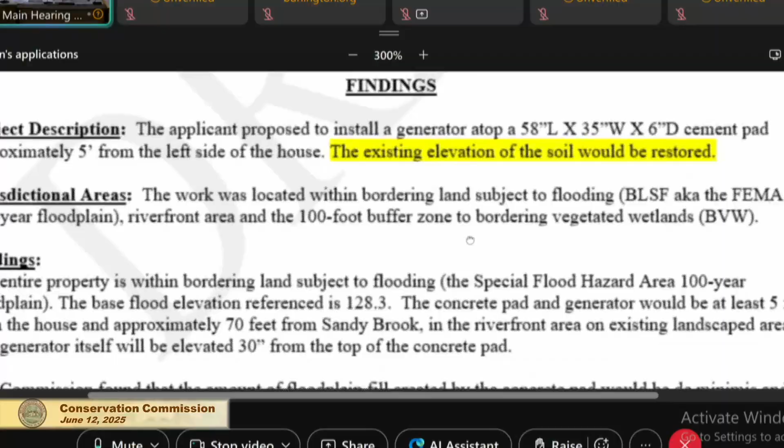You are welcome to. Okay, so, as Lucy explained, Ms. Power, the applicant proposed to install a generator atop a 58-inch by 35-inch wide by 6-inch deep cement pad, approximately 5 feet from the left side of the house. This is highlighted just because I wasn't 100% clear, and I'm not sure Lucy was at the time, about the existing elevation of the soil would be restored. So that's not quite right.

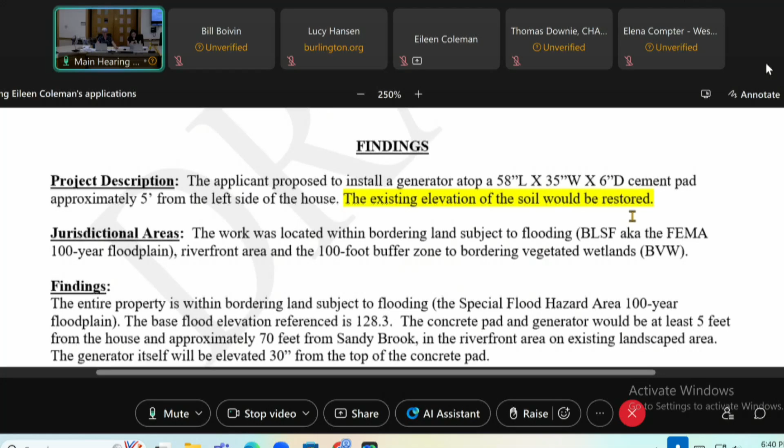The pad will be 6 inches above the existing elevation, something like that, right? Right.

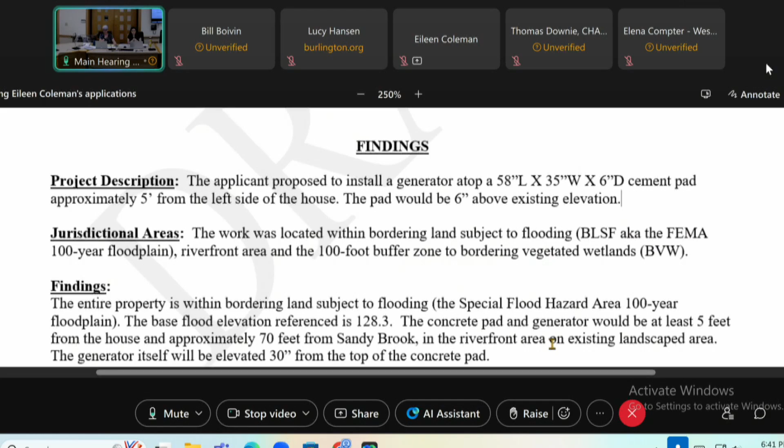The work was located within bordering land subject to flooding, BLSF, also known as the 100-year floodplain, riverfront area, and the 100-foot buffer zone to bordering vegetated wetlands. The entire property is within the bordering land subject to flooding with the base flood elevation at 128.3. It's approximately 70 feet from Sandy Brook in riverfront area, an existing landscaped area, and the generator itself will be elevated 30 inches from the top of the concrete pad.

The Commission found that the amount of floodplain fill created by the concrete pad would be de minimis and will not cause an increase nor contribute incrementally to an increase in the horizontal extent or level of flood waters during peak flows. The generator will be above the flood elevation. Additionally, because the entire lot is flat with a high water table, floodplain compensation would not be feasible. I'm actually going to remove that because that's, I should have noted that, sorry.

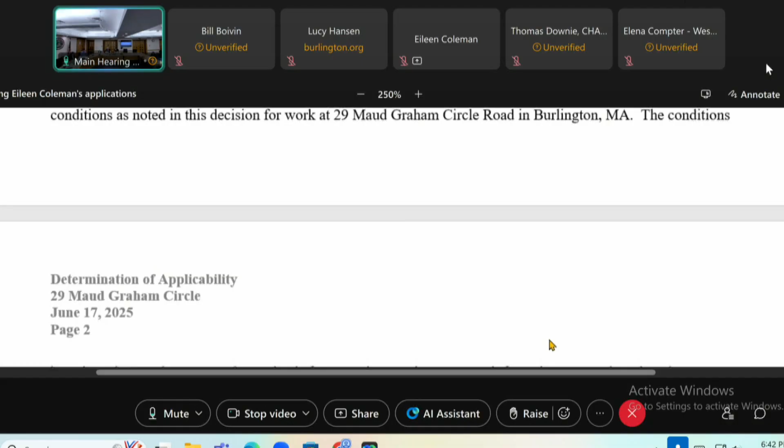The Commission voted to issue a negative determination of applicability with conditions as noted. The conditions are that the decision is only for the work we have described tonight and described herein. Anything else means you need to come back and check with us.

A concrete pad shall be installed on level ground, and the generator shall be attached thereto so that flood waters can flow beneath the generator unimpeded. The generator shall be elevated - I'm going to bold this - at least 1 foot above ground elevation so that it is above the flood elevation.

No tracking of sediments onto public roadways shall be allowed. This is going to be a very quick project, so I don't anticipate anything will happen. No filling or grading of the property under this decision, so only the pad and nothing else.

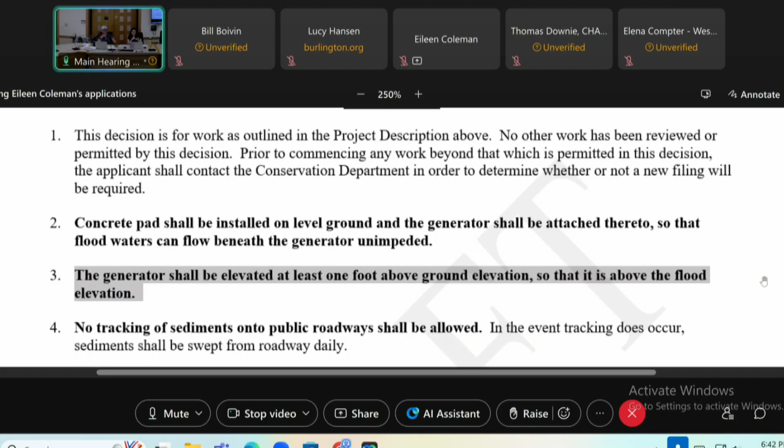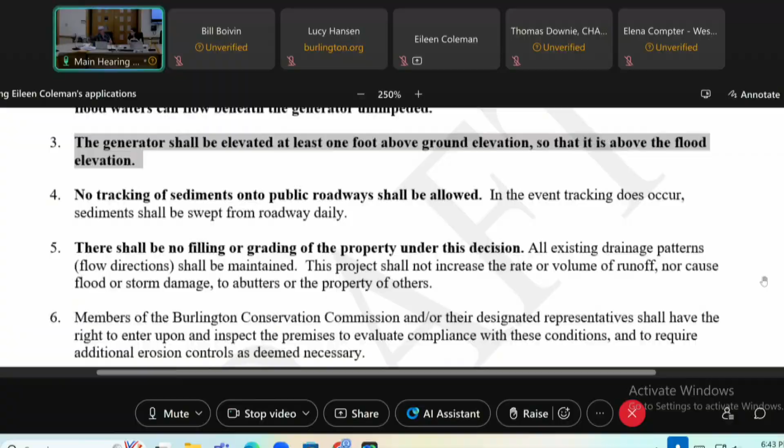Members of the Commission have the right to check on it, but it's probably going to be done in an afternoon. So not much to check on. In that case, we wouldn't think erosion control is required or something like that. Yeah, these are minimal conditions really for something like this.

Do you have any questions at all? Nope, that's pretty straightforward. We appreciate you actually filing with us to get it all correct. Yeah, want to do it the right way.

Could I have a motion to issue a negative conditional determination for the project at 29 Maud Graham Circle under Burlington Bylaw Article 14 and the State Wetlands Protection Act? So moved. Second? Second. All in favor?

So then I get official paperwork, and then I can reach out to the right-of-way company? It's dated June 17th now, what you had in front of you was the draft, so it will be issued on the 17th, that's a Tuesday. If you prefer to come and pick it up, you can tell us now and we'll have it ready. Oh no, that's fine, otherwise it'll just be mailed and then you can get going.

Okay, we'll sign off on the building permit, exactly. All right, perfect, good luck. Thank you very much with the project. Thank you.

I just want to comment here that on the drawing, it says the floodplain elevation was 129 in 2006, the date of the drawing. So it's actually gone down in the 19 years since then. So the new map is actually a little bit lower there.

Okay, so item 5 is a continued public hearing, notice of intent for Middlesex Turnpike and Bedford Street. The Town of Burlington Engineering Department would like to replace a gravity sewer. It is DEP file number 122-721. Anyone here for that one?

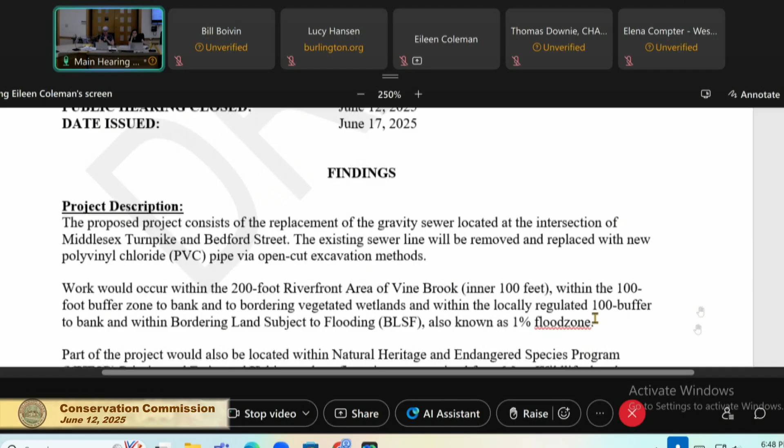Within the locally regulated 100-foot buffer to bank and within bordering land subject to flooding, also known as the 1% flood zone. Part of the project would also be located within Natural Heritage and Endangered Species Program priority and estimated habitat, and confirmation was received from Mass Wildlife that the project would result in no adverse take to resource area habitat of state-listed rare wildlife or take of state-listed rare species.

The project entailed approximately 985 square feet of work in the inner riverfront area and buffer zone and approximately 1,540 square feet of work in BLSF. The project qualified as a limited project under 310 CMR 10.53-3D as it replaces an underground sewer utility. The project meets each of the required conditions of this section of the Wetlands Protection regulations.

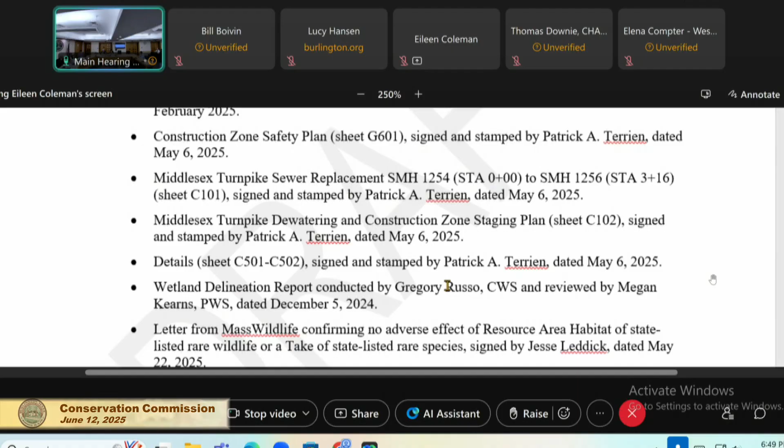Next is just the filing history, and then the plan document references. If there's anything you notice about those, like spellings or something, let us know in the next day or two. The wetland values and areas subject to protection include all the things I just mentioned: the 200-foot riverfront area of Vine Brook, buffer zone to bank and bordering vegetated wetlands, and bordering land subject to flooding. Work occurring within or in close proximity to those resource areas can generate adverse impacts.

The Commission finds that the resource area delineations are accurate, and the Commission finds that there are no practicable and substantially equivalent economic alternatives with less impact. They did provide a substantial alternatives analysis.

They went through the stormwater standards, and in all cases it was not going to create any new discharges, not altering peak rates or volumes of runoff, recharge rates won't change, it will not alter water quality, it's not a LUHPPL, it's not a critical area.

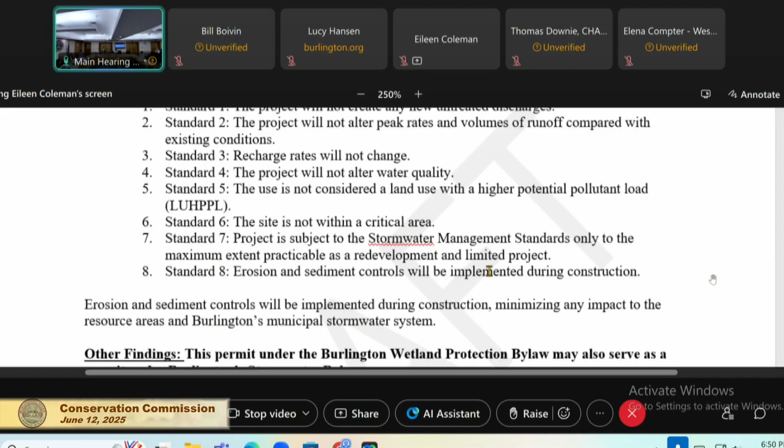It is subject to the stormwater management standards only to the extent practicable as a redevelopment and limited project, and erosion controls shall be implemented during construction. This permit under the Burlington Wetland Bylaw may also serve as a permit under the Stormwater Bylaw. The applicant is responsible for obtaining all other permits.

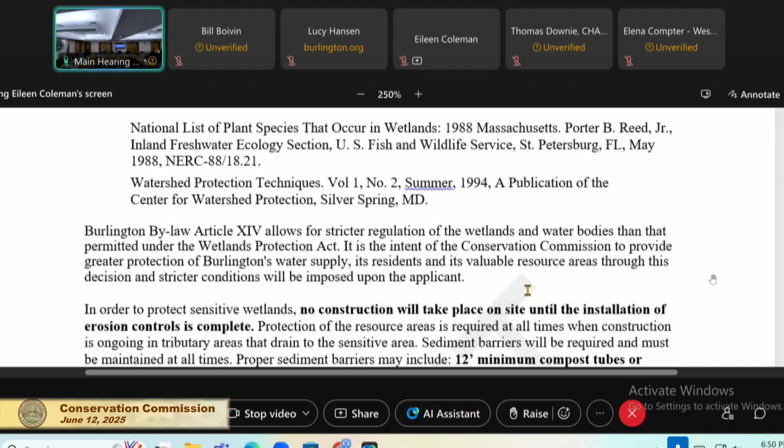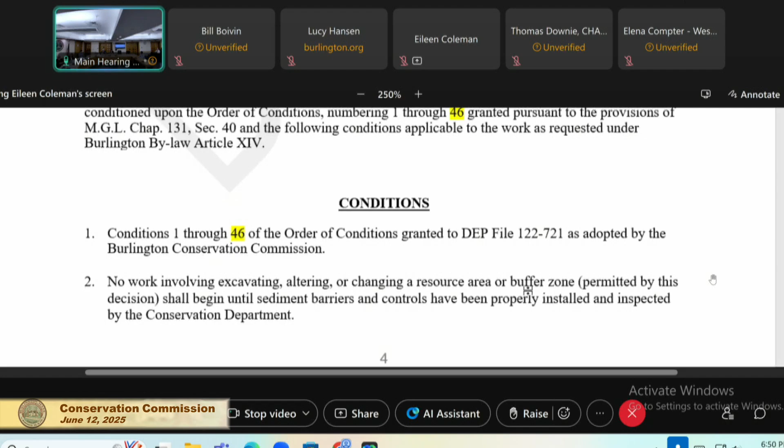It goes on to mention about erosion controls, which in this case is going to be compost tubes, 12-inch minimum, or you may use hay bales with filter fence. And that's really it for the bylaw, unless anybody has anything to stop me on.

Oh, that was the last one. Where'd it go? How many things do I have open here? Okay, well, let's find it. Where'd it go?

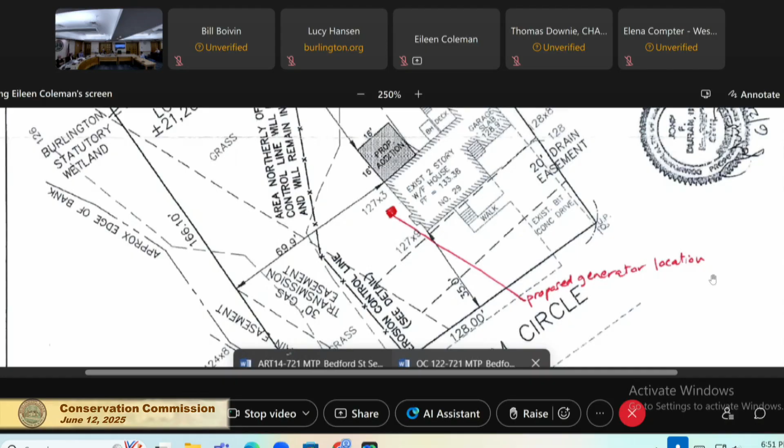Here we go, order of conditions. Once again, we're referencing all the same plan set. A lot of these are standard. Megan knows them pretty well, you probably know them pretty well at this point too, so I'll just zip through a few. The first several are standard.

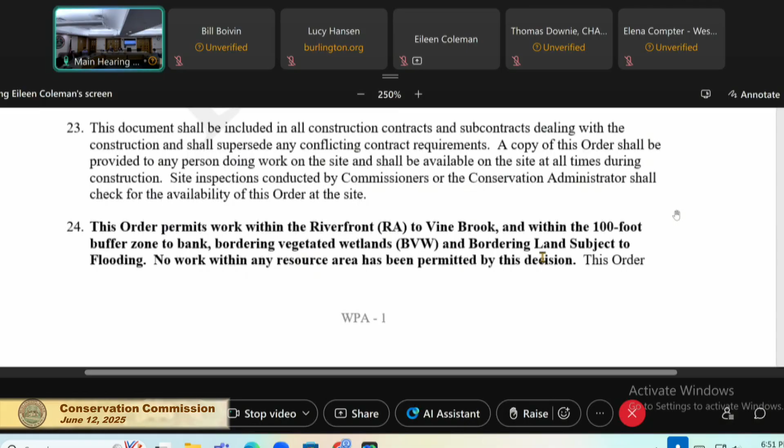We're again saying that this order permits work within the riverfront area of Vine Brook and in all the other areas that I already said. No work within... no, that's not true, because riverfront area is a resource area. So I'm just going to take that out. Okay, sorry.

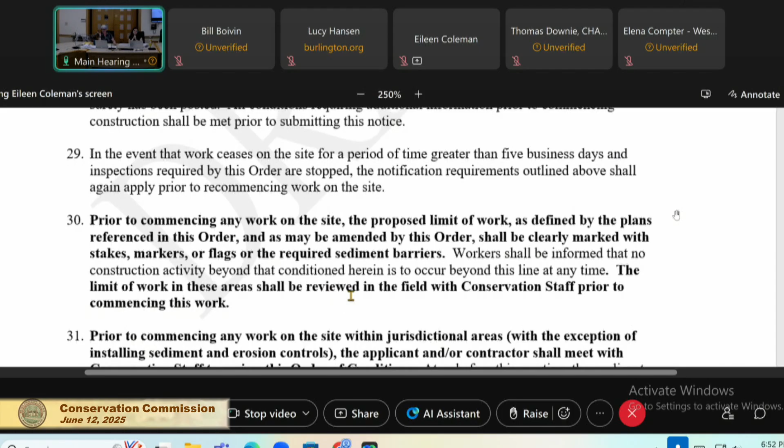Going down, pre-construction conditions: this is saying that you're going to let us know a few days before the work happens. We're going to have a meeting on site, at which time you're going to show us that the DEP sign is in place, erosion controls are in place, your dewatering setup is in place, and you will have, at that time, recorded the order of conditions. We will have evidence of that.

As we said, erosion controls will be either compost filter tubes, which is what it says on the plan, or hay bales and sediment filter fabric fence. Materials should not be stockpiled on the site within 40 feet of the wetlands or brook. All disturbed areas shall be stabilized immediately. Dewatering on this site shall be effected only through the engineered dewatering system, including a frac tank and filter bags, and shown on the approved plan sheet, which is C102.

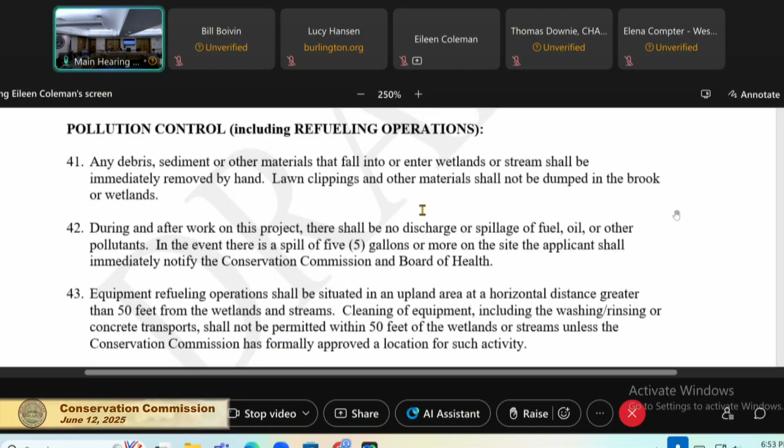Keep Bedford Street and Middlesex Turnpike clean and clear. We have the right to require additional erosion controls. The pollution control conditions are all completely standard about fueling, no discharge, no more than 50 gallons of fuel on site. Pesticides, herbicides, fungicides shall not be used within 200 feet of the stream.

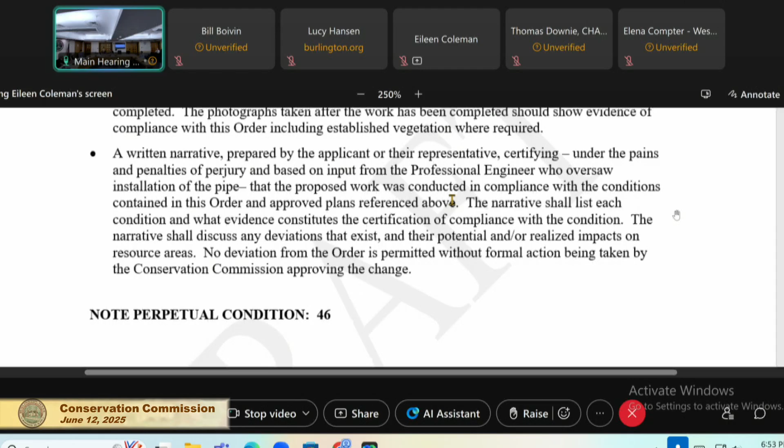And the last one is just how you go about getting your certificate of compliance. We'll need a written narrative and WPA Form 8A. Okay, so do you have any comments at all, or questions? I do not. Okay. Rob, anything? Kent? Indra? Bill? No.

I have one question. You'll be hiring a contractor, right, to do this? Yes. It says materials will not be stockpiled within 40 feet of the wetlands and brook. It's kind of like a corridor down through there. You've got the street on the right, there's a big, huge evergreen tree on the left. So the question is, they're going to dig close to that manhole near the brook, okay? So can they actually comply with this, not stockpiling?

They're going to dig the soil right near the edge of the brook, not the bank, but just up to it. And can you live with a condition that says you can't put that dirt within 40 feet? See what I'm saying? In other words, you're going like this from the road, and then you're going on the dirt, and here is the big tree. You're not going to disturb that, you said. Here is Middlesex Turnpike on this side.

Well, can you remind—maybe it'll be easier if we—how long will it take? And at the end of the day, is the trench going to be closed up, or? Yeah, generally speaking, they close the trench every night.

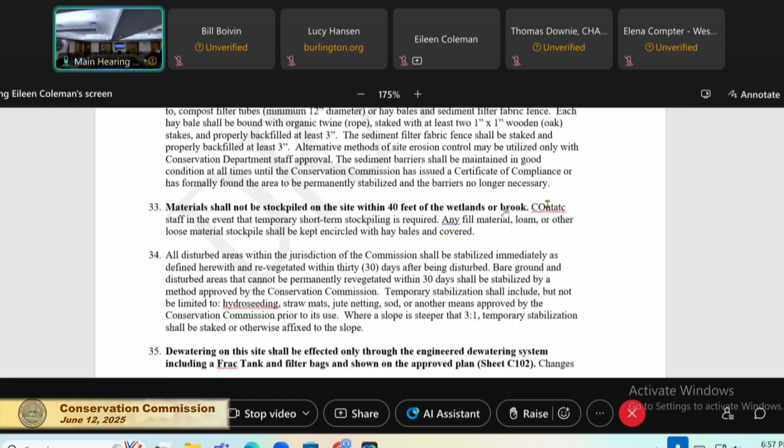Now, who is going to be there for the engineering department, monitoring all the time? Project administration, as well as all the design work, is done by Weston and Sampson. They will have an engineer on staff at all times. And then we coordinate in-house to periodically check on them. Okay, all right, so someone will be there.

Yes, they generally have an engineer on site at all times, and then we in-house go visit several times a day. The reason I ask is because when I was out there, Eileen, remember I saw a dark streak of what I thought might be some kind of oily substance running towards the street? Yep, and we sent the pictures to the Board of Health, and I never heard a thing back. Christine Mathis determined it was just a damp patch, didn't appear to be oil. So it just looked like it. Yeah, but it was a dark, damp patch. So someone will be there, that's the point.

Yes, always. So if some oily substance is found, you know to stop work and report it. Okay, all right, so is there anything else?

Okay, therefore, can I have a motion to close the hearing on DEP file number 122-721? So moved. Second? Second. All in favor?

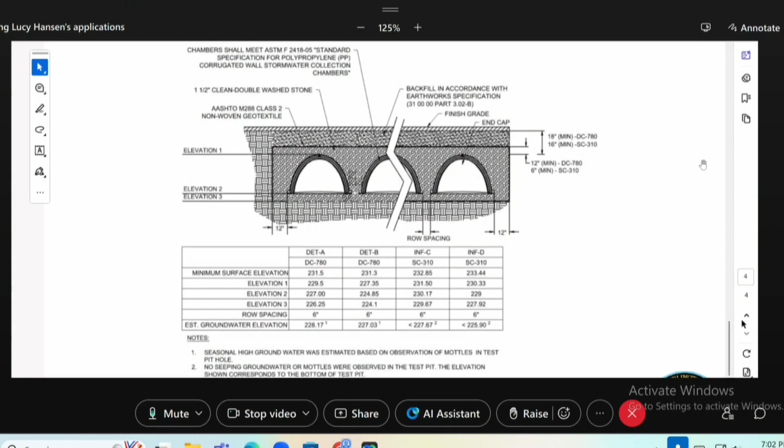And I believe the last item was to verify, which I think we did that night, but you asked that we verify who was going to maintain the phosphorus filtration systems going in. We were able to verify with Megan as we were walking out that night, and then through email, that the water department, the engineer, and DPW confirmed that the water department maintains the whole town's infrastructure and understands this is going to be a new product that they'll get the O&Ms for and take care of and maintain.

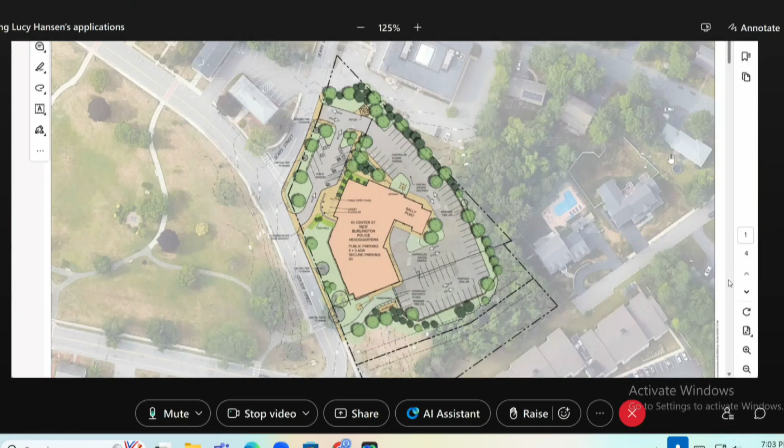Okay, so do you folks want to show your slides now? These are them, it's just the picture. This is the updated site plan, the illustrative site plan. You may notice that we have removed the auxiliary building from the project, so there's no longer a second building on the property. So this is just to give you an overall view of how the project currently stands.

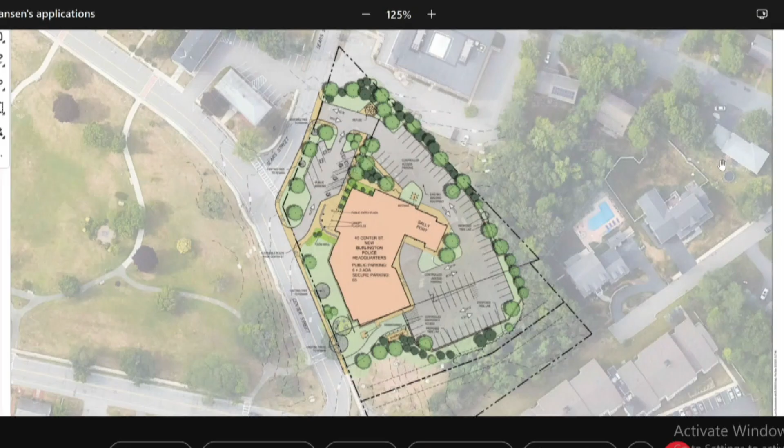And we did add some additional trees where the auxiliary building was, and we also created a little bit of snow storage there so that the fence is moved back from the curb and we can push snow into that area. Okay, why don't we just stop there and discuss each thing, then move on?

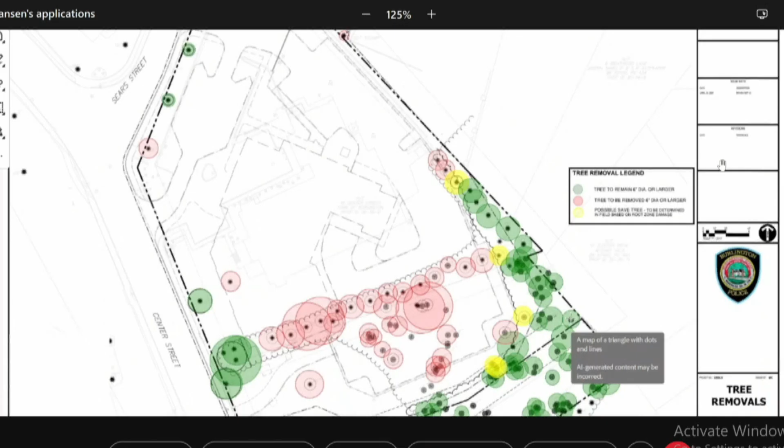How many trees are being planted? Well, she's going to get up to a nicer one. Okay, sorry, Lucy's doing it now. The total number of trees we are planting on the project is 74. There will be approximately 60 shrubs included, and various perennials and grasses. And we intend to seed new lawn and have a couple of areas of a little bit longer, more natural grass.

Correct, correct. So if you look at the plan, you can see that big strip, if you were standing over there, everybody can picture the fence with all the trees in between the 2 properties, the current sculpture park and the police station. Other than the ones right on the street or on the property line, that whole strip goes away, and that's the bulk of the trees, the count of trees that are coming out.

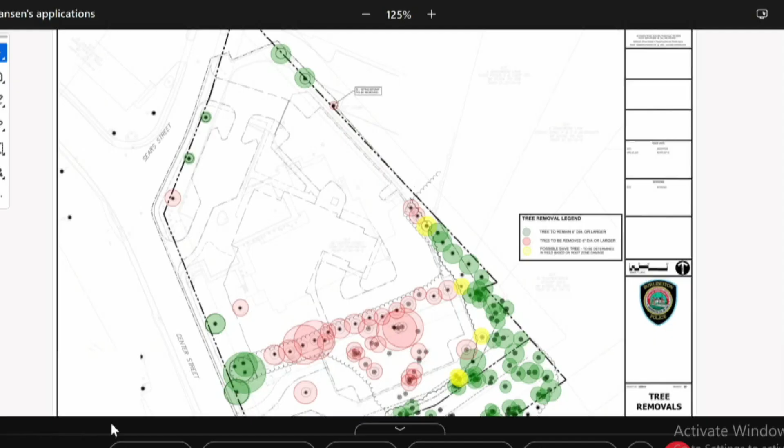Any questions on snow storage? I think all we really needed was a plan, and you have one.

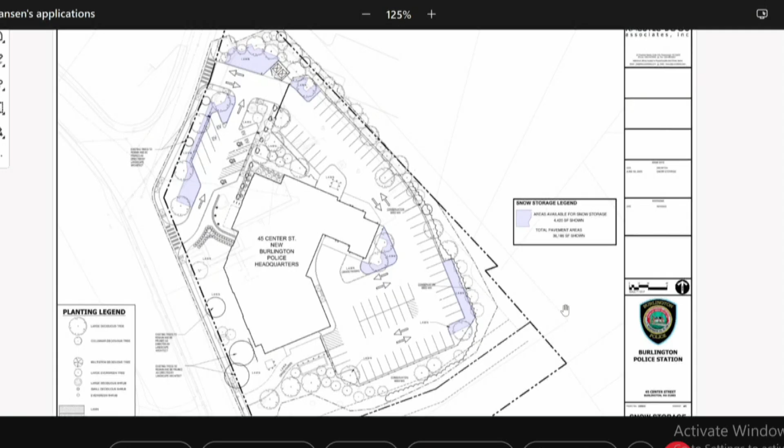And then the final slide is the information about the subsurface detention. And there was a question previously about the distance between the estimated seasonal high groundwater.

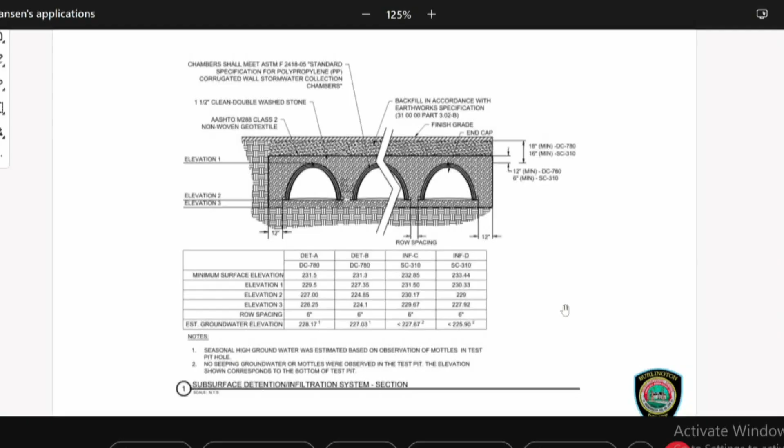Sure, this is not my area, if Elena is on the line, she can speak to it better than I can. Elena, is she? Yes, hello, can you guys hear me? Yes, oh yeah, all right.

So just to give a quick summary, for the 2 infiltration systems, we have at least 2 feet of separation from the seasonal high groundwater to the bottom of the infiltration system. That's how we designed it. It could possibly be a larger separation, but we only had the datum of the bottom of the test pit. To the bottom of the test pit that was excavated, they did not see any evidence of seasonal high groundwater. For the 2 detention systems, they would partially be within the seasonal high groundwater for the short term of the year when the groundwater is at that seasonally high level.

We've had conversations with the town engineer, and it was determined that it's a better benefit to still exclude the liner and allow for the 9 to 11 months of the year when the groundwater is not seasonally high to allow some infiltration, and then for the short term that the groundwater is at its highest level, there will be slightly less storage in those chambers.

Okay, I see. Eileen, do you have any comment on this at all? No, I don't. They were really constrained on this site, because of soil conditions. So I think it's a good idea having them unlined, because at least we'll get a little bit of infiltration in the drier parts of the year.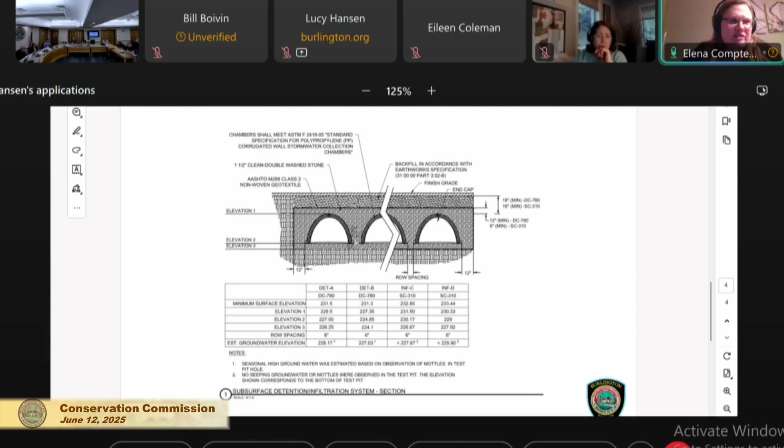Well, we were in a critical drought for several months before that, so I wouldn't necessarily assume that. Yeah, but they are limited, that's the best they can do given these soil conditions, apparently. Okay, all right, good, thank you for that response.

Okay, so is there another slide? No, that was it. No questions. That was simple. Okay, all right, let's see if there's any remaining concerns or questions before we move ahead here.

Eileen or Lucy, is there anything? No, we went ahead and drafted something just on the assumption that we would all come to an agreement tonight, and there have been some edits made to them, so if you guys want to go over the permit, we'll go over the proposed edits as well.

Let's just see what the other people say. Rob? Just said it. Okay. Kent? Good. Indra? All set, yeah. Bill? I like it, yeah. I think it's going to be an asset when it's done, I really do. Yeah, I mean, I like this project a lot. It was a nice job by the design team, certainly.

Two questions. One is a non-conservation-related question. Are there more parking spots than the current situation? Yes, so there's more spots than now, and there's enough spots to fit the whole program, so that's the folks that work there, their personal cars, and the cars that will be parked there at any time.

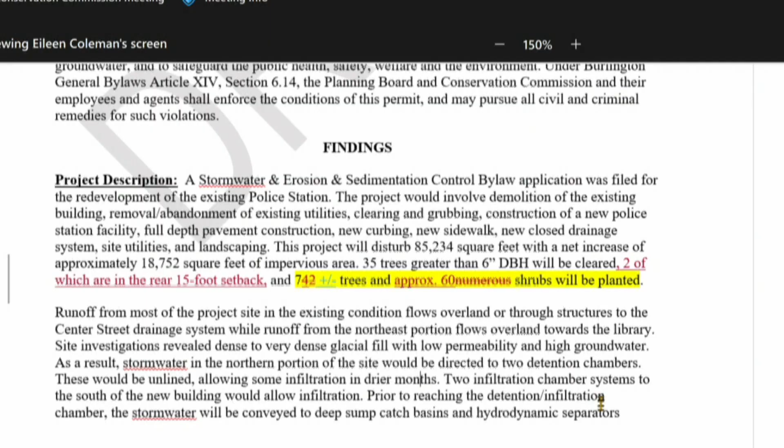Elena, if I say anything factually incorrect here, please correct me so we make sure this is right. These would be unlined, allowing some infiltration in drier months. Two infiltration chamber systems to the south of the new building would allow infiltration. Prior to reaching the detention/infiltration chamber, the stormwater will be conveyed to deep sump catch basins and hydrodynamic separators, which would reduce TSS. The chamber system will have an isolator row to enhance pretreatment.

After the chambers, the stormwater would be routed through a jellyfish filter, which will reduce the phosphorus content before discharge. The rate of runoff would be reduced in the development condition. The volume will not be reduced to below existing conditions, but will be reduced to the maximum extent practicable.

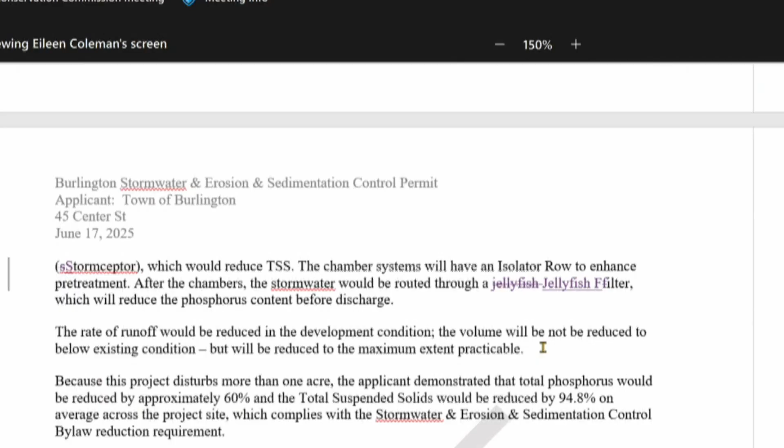Because this project disturbs more than 1 acre, the applicant demonstrated the total phosphorus would be reduced by approximately 60%, and total suspended solids by 94.8% on average across the project site, which complies with the stormwater and erosion and sedimentation control bylaw reduction requirement.

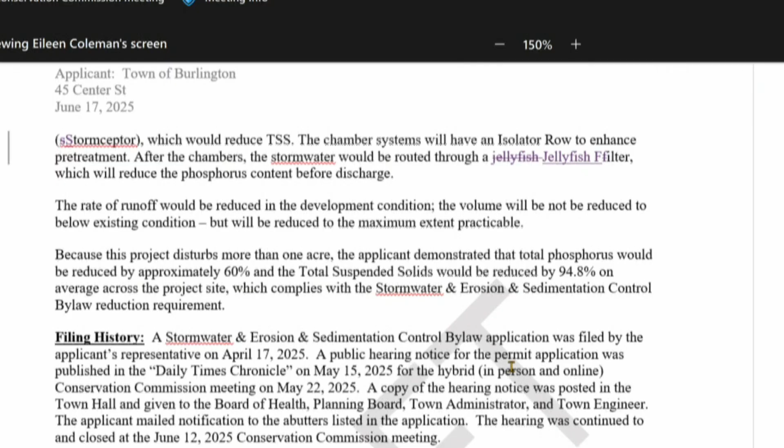Then we went through the filing history, and the stormwater management conditions are that the redevelopment will not create any new untreated discharge nor erosion. Peak discharge rates will not increase. I had incorrectly written this sentence, so thank you for correcting it, whoever did.

Alyssa, the recharge requirement of 502 cubic feet is exceeded, so they are meeting the recharge requirement. It was the volume that they were having trouble meeting. TSS removal will be increased to the maximum extent practicable, which is more than 80%.

This is not a LUHPPL, this is not a critical area. I had written it's a new development project because that is what they were saying themselves in their plan, in their description. I had questioned it at our last meeting. Lisa Mead also seems to be questioning it.

Elena, we were wondering if it would make sense to say there was probably a reason why you guys were basing the calculations on new development, but does it make sense for us to say this is a mixture of new and partial redevelopment?

We can certainly say that. We just had instances in different towns where the way they interpret the stormwater rules, if there is a net increase in impervious surface, then you should consider the whole site as a new development. I agree that this could be considered. I think it's just new where it's new. Anyway, it makes it harder for you to meet the requirements too.

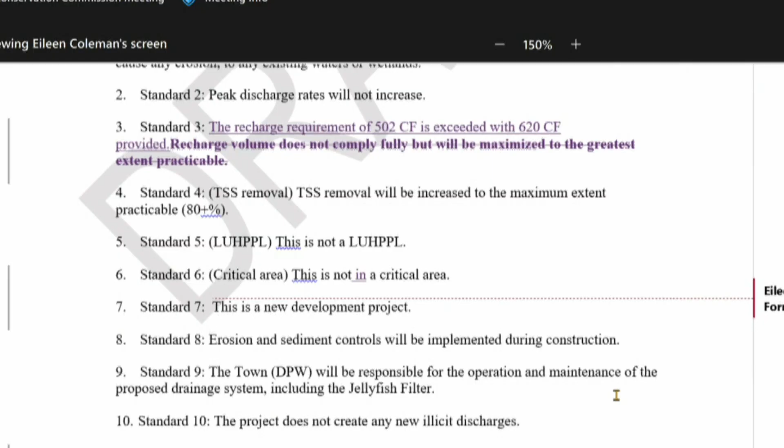Erosion and sedimentation controls will be implemented during construction. The town DPW will be responsible for the operation and maintenance of the proposed drainage system, including the jellyfish filter. The project does not create any new illicit discharges.

Then for conditions, we listed the plan set. Apparently I missed one, so thank you for inserting that. It was a little bit hard to interpret, because Eric had started some of the plans and then Alyssa took them over, so we kind of missed that and it was hard to capture.

So we'll put these in as Alyssa has edited them. We'll keep the edits, so that's fine. And then the tree removal sheet, we're still kind of working on that whole thing. You and I will make sure that looks correct, but don't worry about those. This is just a nomenclature issue we had.

Any changes to the above referenced plans shall be submitted to the Conservation Department for review, and then we would make a determination as to whether some sort of additional hearing was required.

Members of the Commission and their designated representatives shall have the right to enter upon and inspect premises to evaluate compliance with this permit, which means that either Lucy or I will probably pop over there now and then just to make sure everything is clean and going as expected.

A copy of this permit shall be provided to any person doing work on the site and shall be available on the site at all times. The permit does not relieve the applicant from the responsibility to be compliant with all other regulations.

Prior to commencing work on the site, the applicant and/or contractor shall contact Commission staff as needed to clarify the meaning of the permit conditions if there's any confusion. And then we shall be notified at least 1 week prior to the commencement of construction to schedule a pre-construction meeting, at which time we will review the permit and the conditions herein. We will inspect the erosion controls and discuss erosion control monitoring and collect the names of individuals responsible for daily activities.

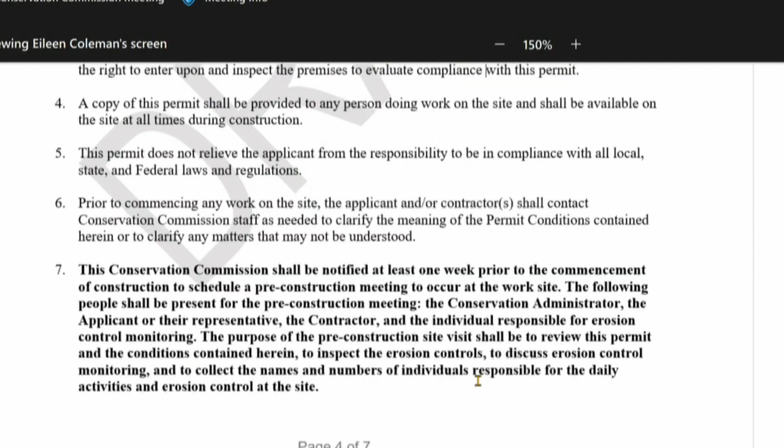Pollution prevention, like I had said to Gage, these are pretty standard ones about keeping the site clear, no discharge or spilling of fluid, cleaning of equipment not on the site.

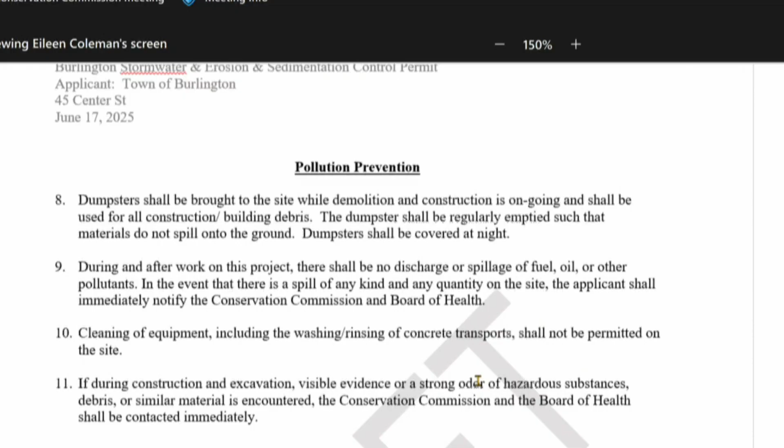And then for erosion control, per your plans, the applicant shall install compost filter tubes, 12-inch minimum, and a stone site entrance from Sears Street, Center Street. I said Sears and I was wrong, it is Center Street. Per the site preparation and demolition plan and civil details plan, at the limit of work on the property. Sorry, the erosion controls are going at the limit of work.

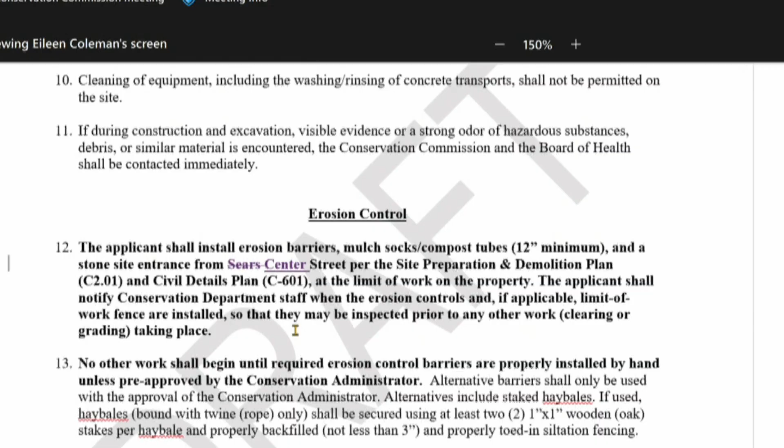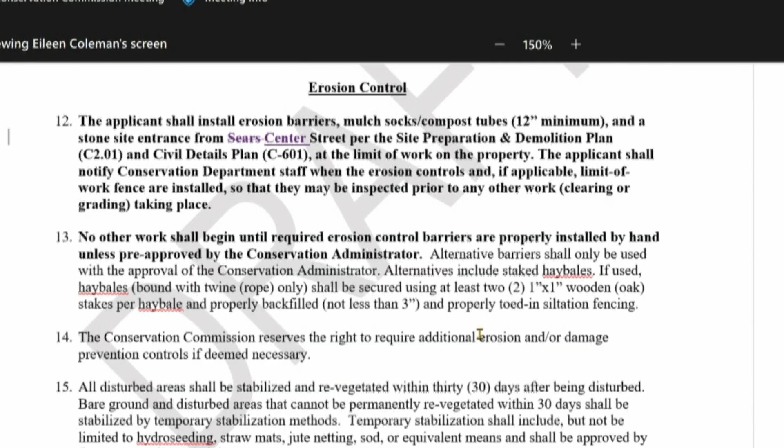No other work shall begin until the required erosion control barriers are properly installed, and alternatives need approval from the Conservation Administrator. We reserve the right to require additional erosion controls. All disturbed areas shall be stabilized and revegetated within 30 days.

Erosion and runoff of soil shall not be allowed onto the streets of Burlington, so daily sweep Center Street and Sears Street if anything is coming off.

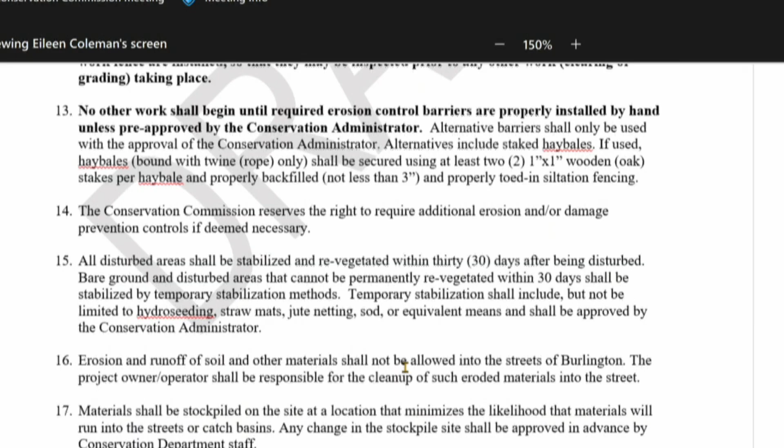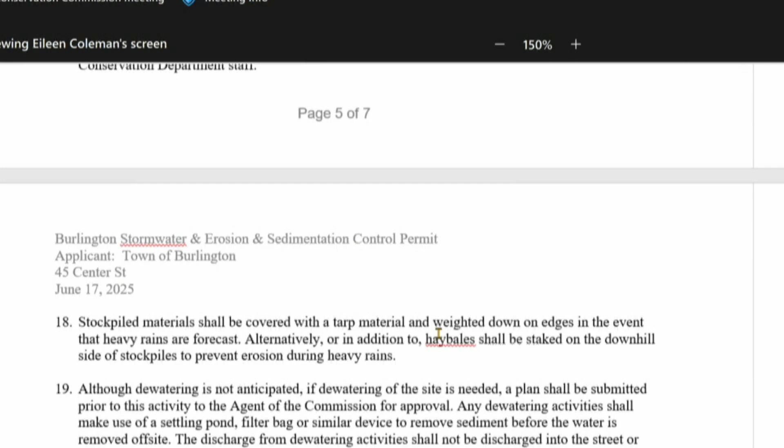Materials shall be stockpiled on the site at a location that minimizes the likelihood that materials will run into streets or catch basins, and any change in the stockpile site should be approved. Stockpiles should be covered with a tarp and weighted down.

This is pretty standard. Dewatering isn't anticipated, but if it occurs, a plan shall be submitted—it is entirely possible dewatering will have to occur on this site. Then you should submit a plan to us that we can just approve, with hay bales or a frac tank if needed, but I don't think that's likely.

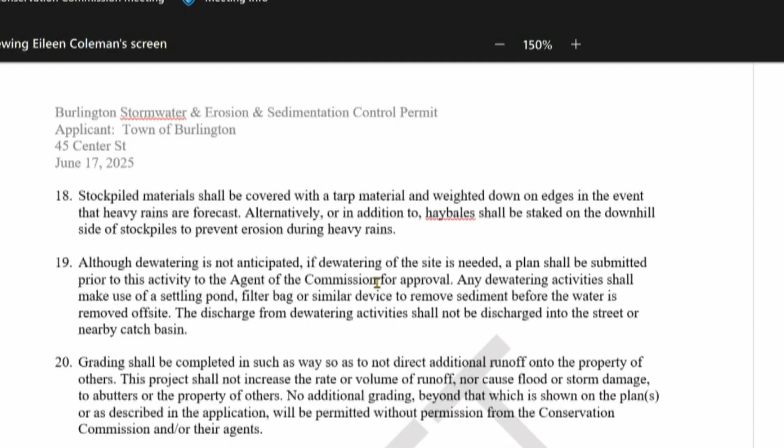Grading shall be completed in such a way as to not direct additional runoff onto the property of others, and this project shall not increase the rate or volume of runoff. The rest is standard: sweeping of paved surfaces shall be done as needed. The project site contractor shall submit a copy of the SWPPP prepared for EPA when that's available.

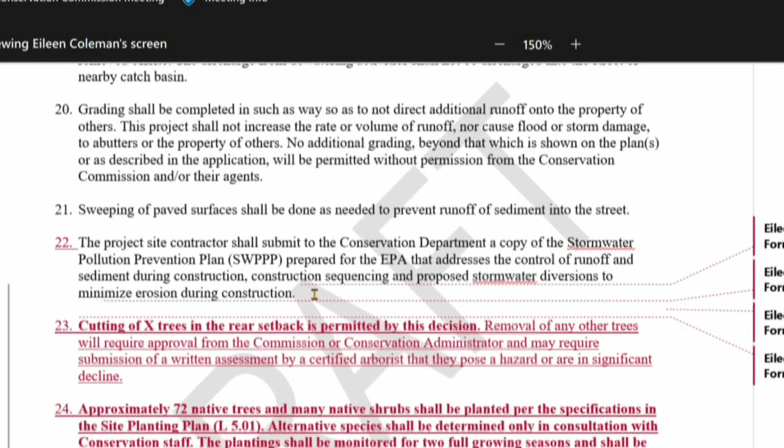I actually just added these two within the last few hours because we talked about this last time and I forgot to add them.

So the cutting of 2 trees in the rear setback is permitted by this decision. Removal of any other trees in the rear setback—let me just clarify—the trees in the rear setback will require, I'll fix the spelling at some point, approval from the Conservation Administrator, and may require submission of a written assessment.

And then approximately 74 native trees and many native shrubs—they're largely native at least, I think a lot of them are—shall be planted per the specifications in the site planting plan.

Alternative species shall be determined only in consultation. This is standard from an order of conditions, but I'm not certain whether...

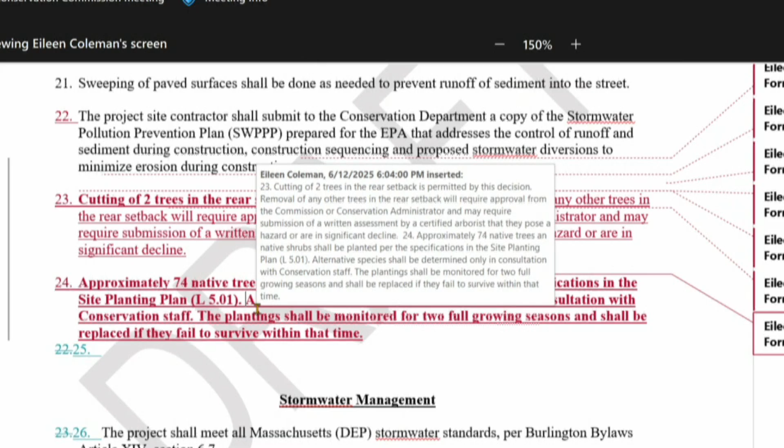Which number are you talking about now? Number 24, where we're talking about the trees. I had just transplanted a standard condition in here about alternative species shall be determined in consultation with conservation staff. I'm not sure that's actually something we can really say because this isn't a wetland filing, so I'm just going to take that off.

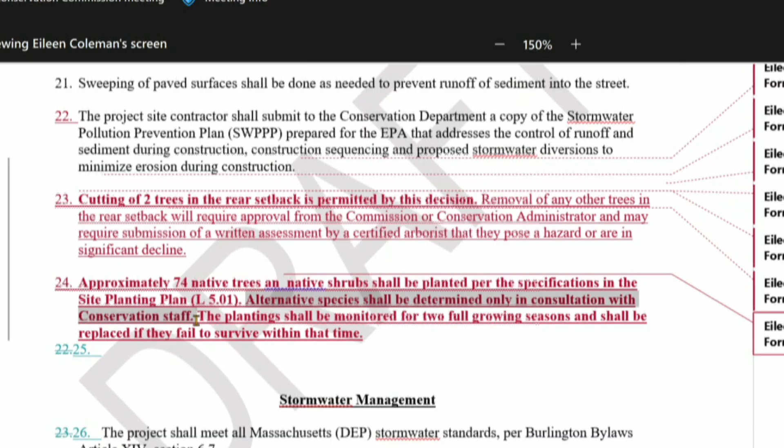The plantings shall be monitored for 2 full growing seasons and shall be replaced if they fail to survive within that time. This has to meet all the state's stormwater standards. Rooftop and pavement runoff shall be infiltrated on site.

Any pre-construction soil test pits shall be witnessed by the Board of Health. The installation of the drainage structures shall be witnessed by a PE.

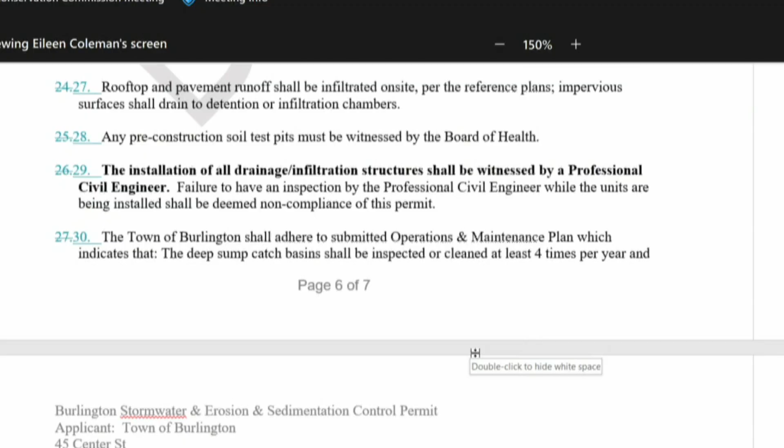The Town of Burlington shall adhere to the submitted operation and maintenance plan, and we outlined a lot of the things that are in the plan here about inspecting and cleaning the deep sump catch basins, the jellyfish, and the isolator rows, and if there was something else, I can't remember.

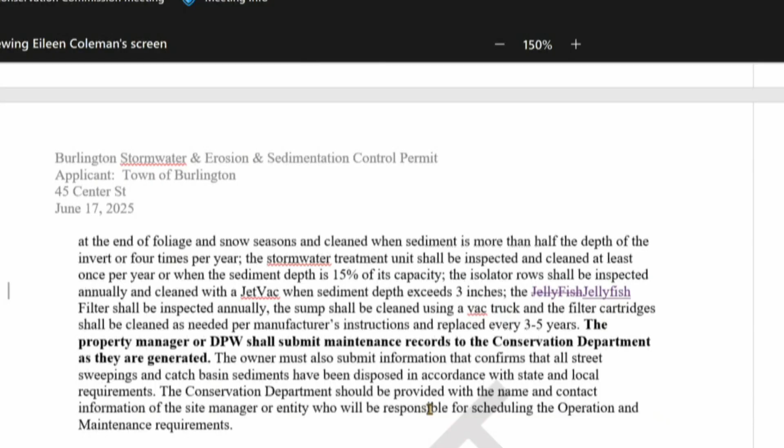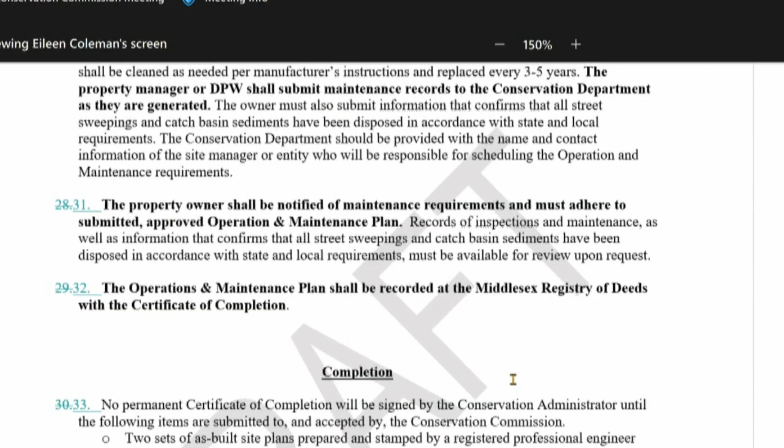And then property manager DPW shall submit maintenance records as they're generated. Property owner shall be notified of maintenance requirements and must adhere to that operation and maintenance plan, and it shall be recorded at the Registry of Deeds with the certificate of completion when that comes around. And then to get the certificate of completion, you need as-built plans and a written narrative by a civil engineer.

I have a- okay, so you folks have any questions? I do. The 2-year replacement requirement, is that within the 15-foot rear setback, or are you asking for that on the entire site? That is, in my experience doing wetlands, a very expensive thing to put into the contract. I understand, that is a fair question, and it's not really for me, it's up to the Conservation Commission.

Could you elaborate a bit more, please? Asking a contractor to warranty a plant for 2 years is very expensive. It is typical, something that we do in a wetland jurisdiction. I completely understand that. So I'm asking if the replacement is for the trees that are going within the 15-foot rear setback, which is the jurisdiction of the Concom, or if you're asking for the entire site.

Well, I think the original intent was they were asking for the entire site, but I think we need to consider what you're saying. I do, it really is a bigger ask than you really have jurisdiction for. There's really only 2 jurisdictional trees. Yes, that's true. And whatever plantings are in that setback, perhaps we could say, but that would be it.

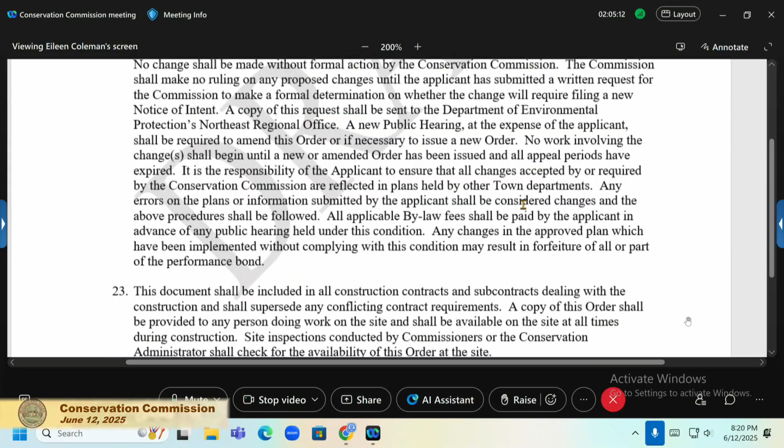Are we on the permit conditions now? We will go over them right now. So the plan references are going to be exactly the same as they were in the article, which Vivian is sending to me, or has sent me, and I will replace them. The first several of these are pretty standard - the work has to match the plans.

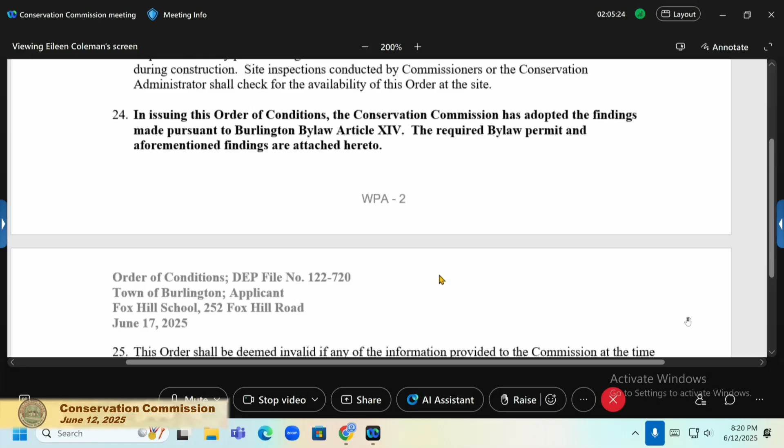In this order of conditions, the Commission has adopted the findings made pursuant to Burlington Bylaw Article 14. These are all standard, and they've all reviewed them. Let's just jump down to pre-construction conditions.

Which says, again, like we told the previous applicants, you need to be in contact with us a few days before construction starts, and Lucy and I will be out to visit to make sure erosion controls are in place, your DEP sign is in place, dumpsters or whatever other oil containment is all in place, including extra erosion controls.

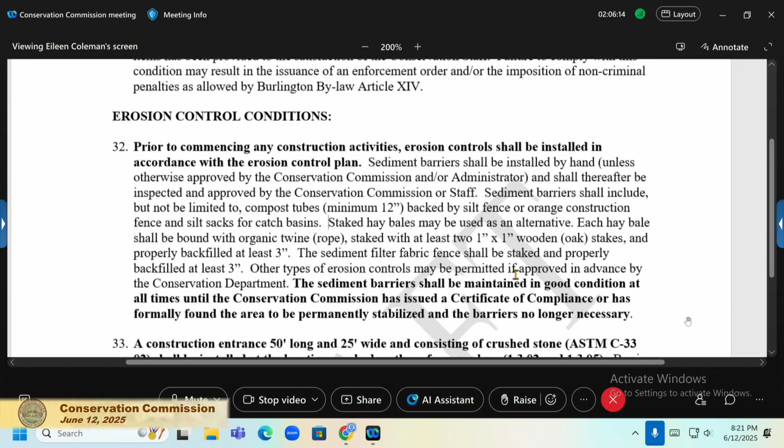What your plans said - oh, that's why I highlighted it. Your plans did say compost tubes minimum 12 inches backed by silt fence or orange construction fence, and silt sacks for catch basins. That was what was in your details. Staked hay bales may be used as an alternative if you prefer, and the sediment barrier shall be maintained in good condition at all times.

A construction entrance 50 feet long and 25 feet wide, consisting of specified crushed stone, shall be installed at the location marked on the reference plans, with location and detail shown on two different plans. At the end of the day, the applicant shall mechanically or manually sweep sediments from all paved surfaces. Disturbed areas shall be stabilized immediately.

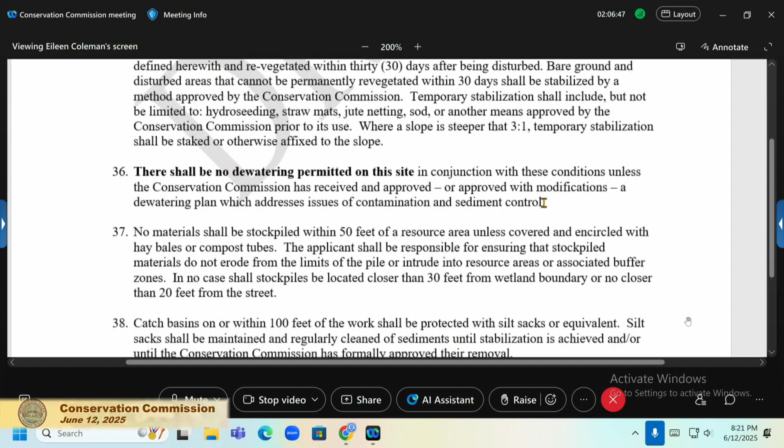There should be no dewatering on this site unless a dewatering plan has been submitted and approved. No stockpiling of material within 50 feet of resource areas unless covered and stabilized. Silt sacks shall be placed in catch basins within 100 feet of the work. No additional grading may be permitted without first filing a written request to the Commission, and we reserve the right to require additional erosion controls.

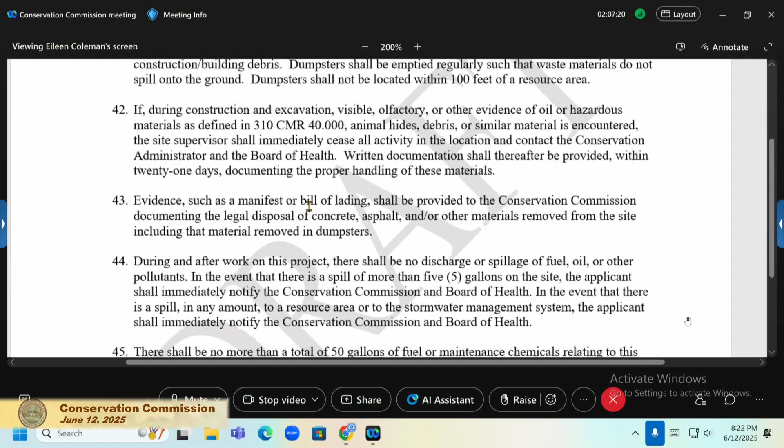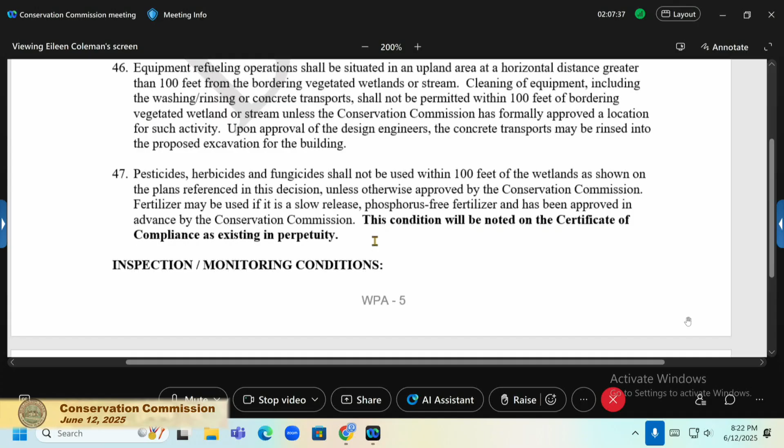The pollution control conditions are all perfectly standard, covering dumpsters, hazardous waste, fueling and the amount of fuel allowed on site, and pesticides, herbicides, and fungicides, which should not be used within 100 feet of the wetlands as shown on plans referenced in this decision. Fertilizer may be used if it is a slow-release, phosphorus-free fertilizer, and this condition will be noted on the certificate of compliance as existing in perpetuity.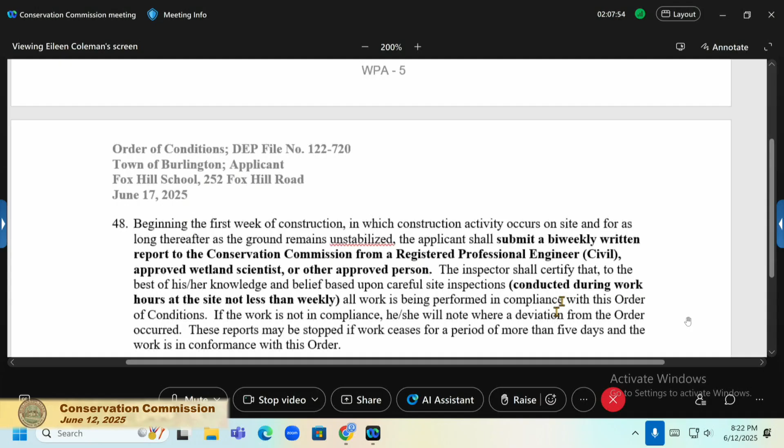Here we also reference the same thing about inspection or monitoring plans. So the Commission now shall require a bi-weekly written report submitted to the Commission from a registered PE, approved wetland scientist, or other approved person.

Let me just clarify that this usually applies while work is ongoing. With some sites, work entirely stops in winter. I don't think that will happen here, but then you can ask for a stay on the inspection reports, if that helps.

Do we contact you? Yes, in that case. Okay. Did you say bi-weekly or bi-monthly?

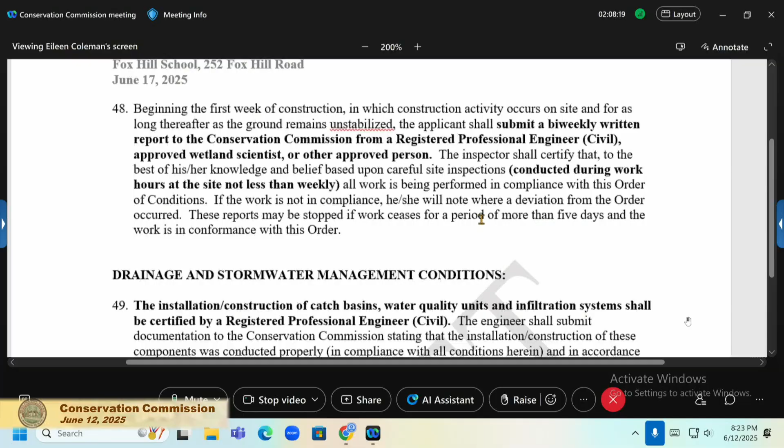Bi-monthly reads as once every two months. Weekly, that's bi-weekly. Can't we just say every two weeks? That's what the words say. Did I say something different? Bi-weekly means twice, bi-weekly, yeah that's correct. Our English is a little debatable what it means, every other week. I like Larry's better, every two weeks, go with that, throw the other one out. I'll just put it in parentheses. If we say bi-monthly, the choice is between twice a month and once every two months, but if we say bi-weekly, the choice is between twice a week and once every two weeks. Every two weeks, it's okay. I put parentheses, twice per month as well, so that's clarified.

The installation and/or construction of catch basins, water quality units, and infiltration systems shall be certified by a registered PE. The applicant shall adhere to the long-term operation and maintenance plan, and we put some details in here about what that plan says. For example, the drains shall be inspected four times a year and cleaned per the plan.

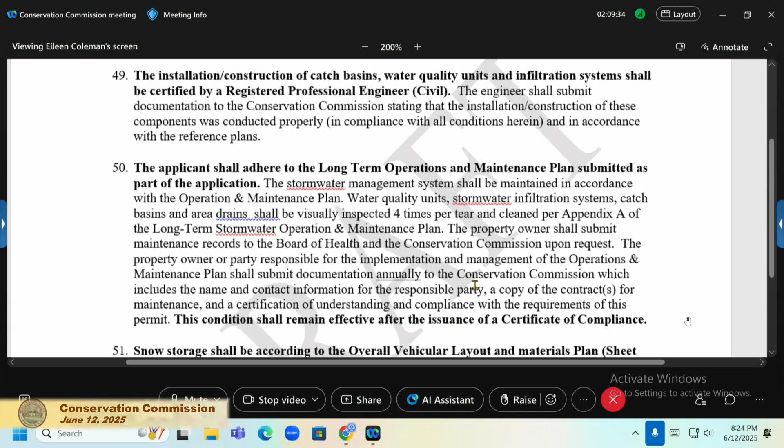The property owner shall submit maintenance records to the Board of Health and Commission upon request, and shall submit documentation annually to the Conservation Commission, and that condition shall remain effective after the issuance of a certificate of compliance. Snow storage shall be according to the overall vehicular layout and materials plan sheet, etc., and the stormwater management plans contained within the long-term stormwater operation and maintenance plan, and the O&M plan shall be recorded at the Registry of Deeds with the certificate of compliance.

The buffer zone and landscape management conditions is where we mentioned the trees. First of all, we said no invasive species shall be planted anywhere in Burlington. This condition shall be noted on the certificate of compliance and shall continue in perpetuity.

I'm just highlighting that so we make sure that one's listed, because that's usually on the bottom. I'm putting it in a different color for myself to remember. Oh, and that didn't work.

Native trees and shrubs shall be planted per the approved landscaping plan. Plants within the resource area and buffer zones, which we just added, that are observed to be damaged or unhealthy during the first two growing seasons shall be replaced. Was everyone okay with that? Yes, that's what we agreed upon.

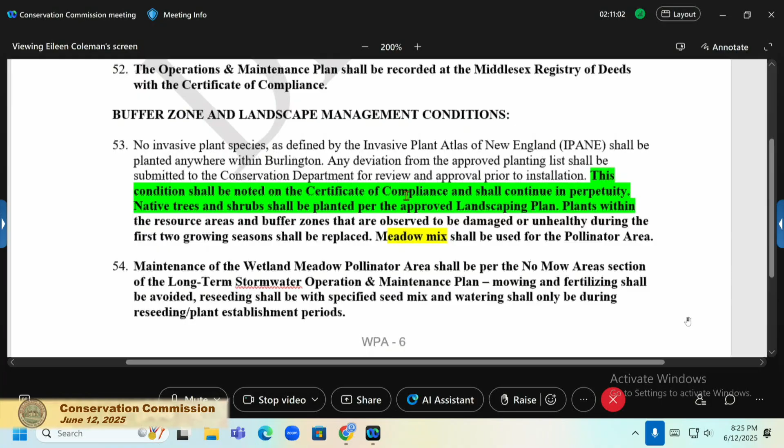Meadow mix shall be used for the pollinator area. That was highlighted because I felt there was a special name for it, and I wanted to make sure we put the special name in. Ernst Seeds had a particular name for it, and I wanted to put the proper name in. Why is the only highlight in this document meadow mix?

I just said that because the plans had a special mix from Ernst Seed that had a special title, and at the time I just wanted to finish what I was doing, and I didn't get the exact name of the meadow mix, but I wanted to put that in. That's why it's highlighted. If anybody knows what the name is, I'll put it in right now.

Was somebody speaking? Yes, it's Kelly. I just want to be clear that you don't want us to change the seed type. This confused me a bit when I looked at the report. No, because we have... go ahead.

We have the Mesic to Dry Native Pollinator Mix, Ernst 105 seed mix. That's the name. I just wanted to make sure we were staying with that, and not going with the facultative wetland meadow mix that is by the resource areas. That's why it was highlighted, because I wanted to look up that exact name. Kelly, what was it again? Sorry, let's just get it done right now.

What was it called? So the name from Ernst is called Mesic to Dry, M-E-S-I-C, sorry. Mesic to Dry Native. Is there a message? Mesic to Dry Native? So it's Mesic to Dry Native Pollinator.

I did produce, essentially it's just a sketch showing that figure that I presented at the last hearing, with some call-outs of where we perceived the ground disturbance to intersect key areas. Could you help also highlight, for the benefit of the commission, what the various legend designations mean?

Sure thing. So the broad green area that has that bulbous part in the southeast of the site, that is a bordering vegetated wetland, so clearly state jurisdictional and local jurisdictional.

The blue lines are, I'll call it a refresh, an attempt to flag both sides of the channel of stormwater drainage channels that kind of flit in and out of surficial flow. So you'll have a channelized area where water maybe goes underground a little bit, or it fans out into less channelized areas, but essentially all that water that comes out at the northeastern corner of that site eventually gets down to the wetland.

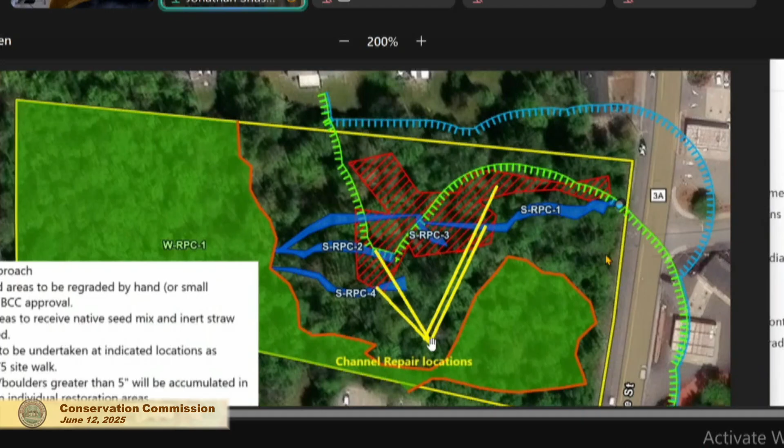And over time, some of those channels have been more active than others. So those blue lines, the one in the north is more active, and it also reflects the 2018 assessment of the site that I was involved with at a prior firm.

There have since been some hydrologic changes at the site, where the water is flowing out and going in different directions. We wanted to assess how we repair these channels.

That brings me to the red polygon, the red hatching, which is an approximation of the limit of ground disturbance. That includes some areas that are more minor, where we would just do a light seeding, and other areas where the soil has been churned up by heavy machinery moving, so maybe there's a foot differential between the low spot and the high spot, and we need to even that out in those troughs by hand.

The yellow lines are what I just drew in for the sketch, pointing to four key areas that we saw on the site where we would be retaining, regrading, and reestablishing the channels.

Okay, and the blue cross-hatching at the top? That is the local jurisdiction of the commission. So the entire site is under your jurisdiction. The green line with the tick marks, that is the 100-foot buffer off of the BVW, so the jurisdiction under only the WPA.

Got it. And then if you count these locally jurisdictional stormwater channels based on the interpretation of your bylaw that occurred at the time of the 2018 ANRAD, the entire site is in your jurisdiction. Right. All right, thank you.

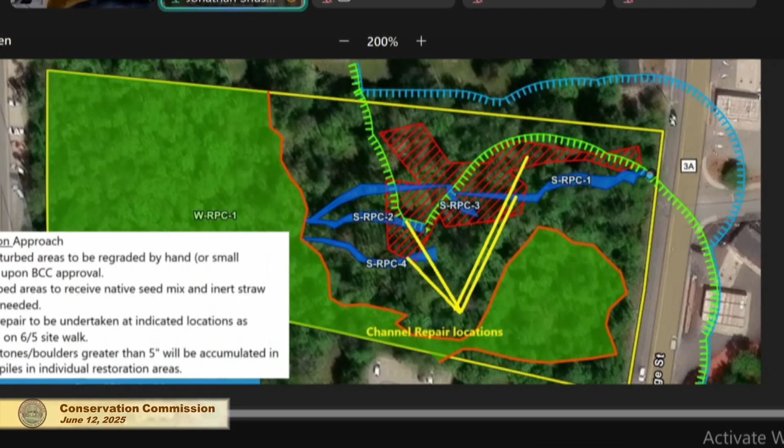So do we need to take a vote at this point? I think you should vote to accept this approach and allow staff to work with him on the more detailed nuance.

I'd like to have a motion to vote support for the plan put forth for 0 Cambridge Street, parcel 35-115, where vegetation and surface damage occurred, and that the applicant or their representative will work with staff to flesh out any further needed details. Is there such a motion? So moved. Second? Second. All in favor?